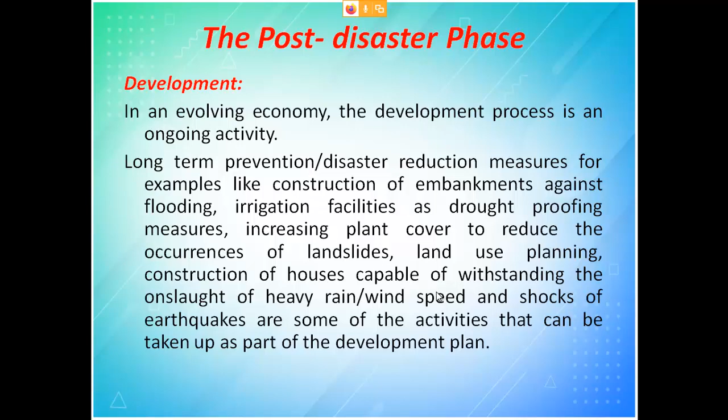Land use planning, construction of houses capable of withstanding heavy rain and wind speed. So you have to construct houses such that they withstand heavy rain, wind speed and shocks of earthquake. These are some of the activities that can be taken up as a part of the development plan.

Damage assessment methodology. Now we move on to damage assessment. The primary focus is on the condition of physical assets. The first one is buildings. We do damage assessment for buildings, then roads, bridges, then water supply and sanitation, then dams and other irrigation structures, then industrial facilities including power plants, ports and other coastal structures, electrical and communication system structures.

So it may be asked as a 16-mark question: how are you going to do assessment for disaster management? When you say assessment, you have to do it for buildings, roads, bridges, water supply, sanitation, dams, other irrigation structures, industrial facilities, ports and other coastal structures, electrical and communication systems.

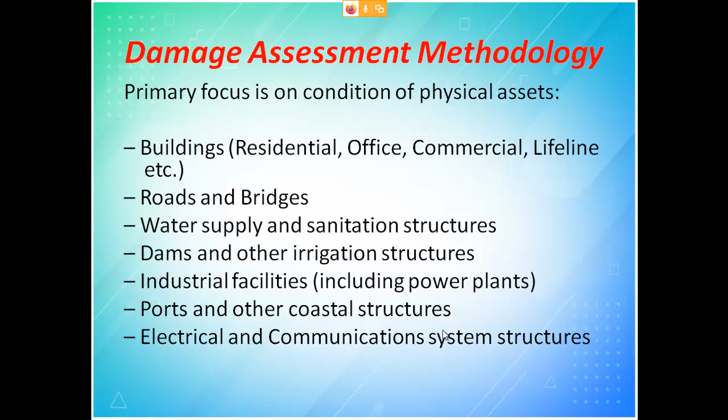I think in Vardah we have seen, this last time, the electrical and communication system totally collapsed. Your electrical towers and communication towers, all have been uprooted. So you have to do assessment. So how to overcome this? Let us start with the objective of damage assessment.

It widely depends on the type and the intensity of the disaster. So it is not common; you cannot do a common damage assessment. Depending upon the disaster, first of all, it will vary. Then the intensity. Disasters will not be the same all the time. We have seen so many cyclones, but Vardah is different. Usually when cyclones cross the land, they lose power and just give rain.

Whereas Vardah entered and even crossed to the other part of the peninsula. Even Kodaikanal is a place where they have not seen a cyclone at all, but Vardah entered till the Kodaikanal region and uprooted so many trees there. This has not occurred previously. So that is what we call intensity. In some cases intensity will be less, in some cases more, and if intensity is more, the damages will be more. So you have to go for assessment properly.

Again, in damage assessment we have the classification as short term, medium term and long term. Short term is within a few days: to quickly identify safe and unsafe buildings. You go and do your study, identify whether the building is safe or not, quickly estimate the total damage losses, and quickly identify the status of lifelines of the building and other structures.

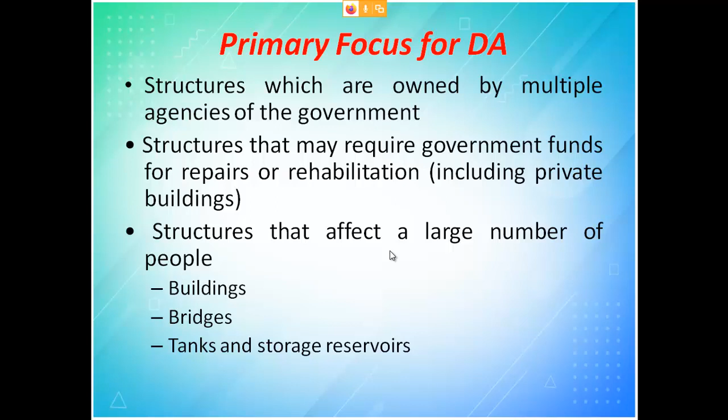Secondary focus is structures owned or operated by specialized agencies. There you will not have such problems. These are very complex structures that require high level technical skill for assessment, like complex industrial facilities. A normal person cannot be taken to a power plant and asked to assess it. He cannot do any assessment at all.

For example, as final year students, you can be asked to assess your house for electrical safety. You all know the basic requirements: there should not be any switch in broken condition, and if there is, that switch has to be replaced. A normal switch might be a 5 amp or 15 amp switch. If you are joining wires, there should be insulation tape to join them. All such things are very common for your house.

If you are asked to go and do the same audit work in an industry or in a power plant, you cannot do it. Specialized skill is required for complex industrial facilities.

Port and harbor structures are another example. A normal civil engineer who constructs houses cannot be asked to assess a port, because the structure itself is different. Then petrochemical infrastructures, dams, roads, electrical generation and transmission networks, all these require special skill.

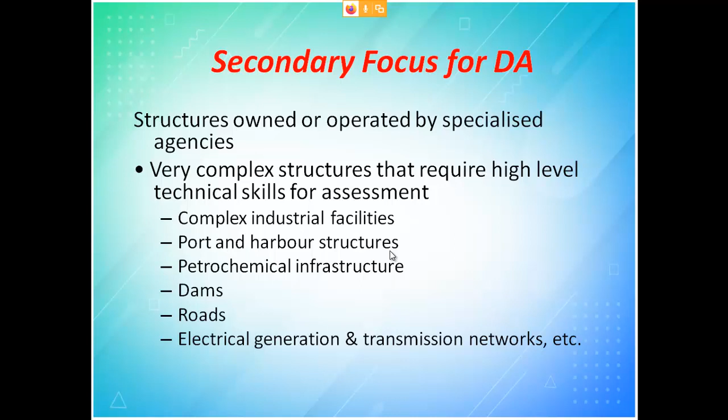The basic philosophy of assessment should be based on international sound practice. When going for assessment, I have a guidelines book, which we call a cookbook, published by international agencies like IEEE, IET and others. You have to follow that procedure.

I will give one small example. In your house you may have an EB board, a small wooden board about 1 meter, with one fuse carrier and one changeover switch. That is normal. But for an industry, if you are putting a panel, then in all three directions the wall should be at least 5 meters away from the panel.

The reason is, if I go and touch that panel and get shocked, I should not go and hit any wall. That could lead to multiple injuries from the electrical shock and from hitting my head on that wall. This is what the standard says: you should have a wide space between the panel and the nearby wall.

You can do this only if you have sound knowledge of international practice. You should consider the types of structures prevalent in Gujarat, as an example. They should consider the technical skills likely to be available after a disaster, and should incorporate experience from recent disasters, particularly the 2001 earthquake and 1998 cyclone. They say this has occurred, try to get knowledge from that.

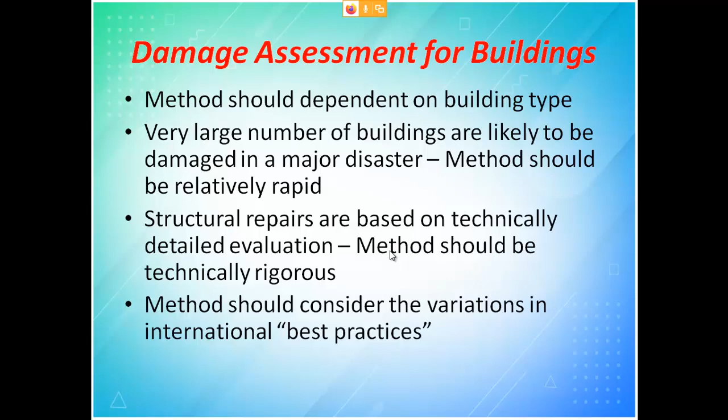Damage level is shown here: slight damage, moderate damage, extensive damage, then the percentage, then comes immediate occupancy, damage control, life safety, limited safety, near collapse. When damage is more, the assessment report says safety is not there. If it is moderate, they say life safety is possible. If it's very slight damage, they say immediate occupancy — you can go and occupy after the disaster has occurred. This is the level of damage.

10, 20, 30, 40 percent we call slight; 50, 60, 70 we call moderate. When damage is more than 80, 90 percent, we call it extensive damage. So if the damage is more, depending upon that, you decide the control action.

Then they are split into grades: grade 1, grade 2, grade 3 and grade 4. Grade 1 is slight, grade 2 is light, then comes moderate, heavy and major, and a color indication is given. All this, the person going for assessment should know.

When you see 'light' anywhere, it is understood to be in the middle of slight damage. When you see 'heavy', it should be in the order of 80 and 90. 'Major' means more — it's a partial collapse. In some cases, we mark it with a color like green tag, yellow tag, and red tag. From the color, you are also supposed to identify the level.

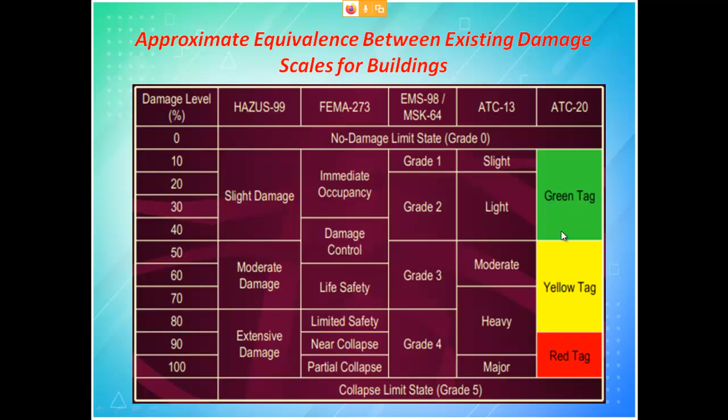Then the proposed procedure for damage assessment of buildings. International experience clearly shows that a single fit-all methodology is not feasible to satisfy all short, medium, and long term objectives. That is what I already told you — safety as well as assessment is not common for all types of buildings.

In other words, if I write one set of rules, those rules will not match all types. So you should not say it is there in the book and that we should just follow it. That is why they say fit-all is not at all possible — everything will not fit all. Some codes will fit particular types of buildings, and some will not.

A three-step methodology has been proposed: rapid safety assessment, detailed safety assessment, and engineering evaluation. From the word itself it is clear — when you say rapid safety assessment, by seeing itself we can conclude this is worst, this is okay, this is a condition where you have to keenly watch.

Detailed safety assessment means taking old records, trying to visualize, and seeing if the same building was there in a previous earthquake — what was the level then, and what deterioration has occurred now. When you say engineering evaluation, take paper, pen, and do calculations. You might have studied many experiments — put all that experiment into real time and try to see what the condition is. That's what we call engineering evaluation.

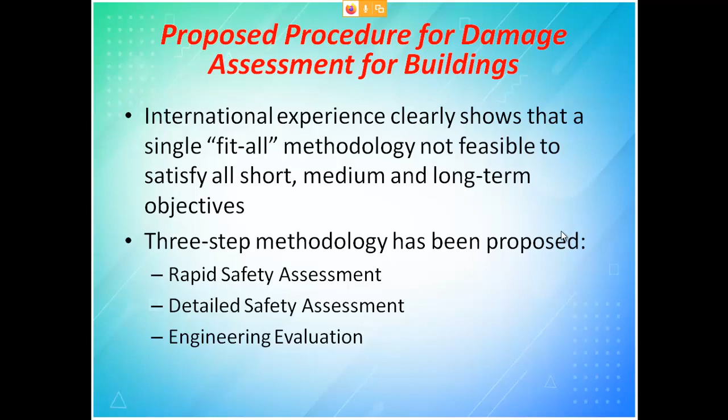That is what is explained here. Let us skip ahead. Then damage assessment for bridges, low redundancy structures — try to understand this part. This is more about civil and less about electrical, and nothing with respect to mechanical, because structures are predefined here. Now there is no structure — only civil and electrical matter.

Structural repairs are based on detailed technical evaluation. The method should be technically rigorous. Damage assessment is likely to be carried out by a technical person. From the first, I'm saying only a technical person should come into the picture.

So there are government opportunities for you to get into this area — government jobs are there. Only we are not getting in, but there are many government jobs for assessment. One who does assessment is called an assessor, similar to energy auditing. There are auditors required for disaster management also.

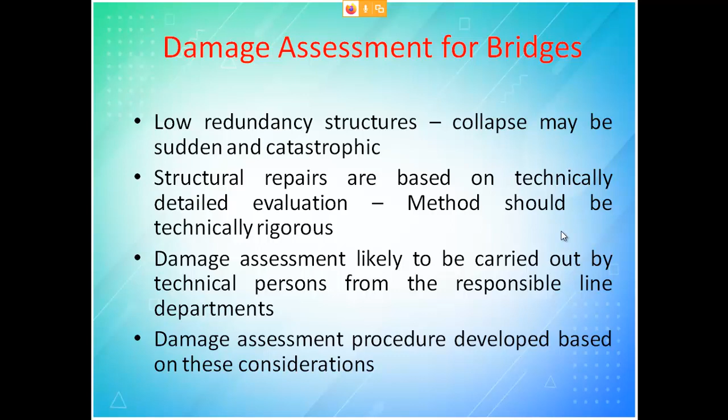Then storage damage assessment for storage reservoirs also requires technical knowledge. Initial damage assessment is likely to be carried out by checking what was the condition 10, 15, or 20 years back, and from there how the damage has progressed, so what should be done. The damage assessment procedure is developed based on these other considerations.

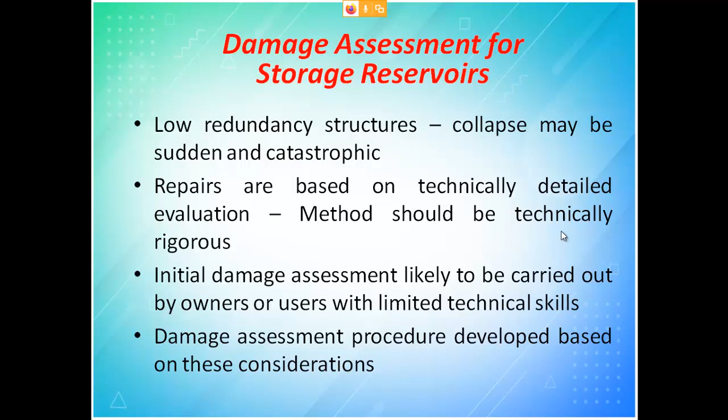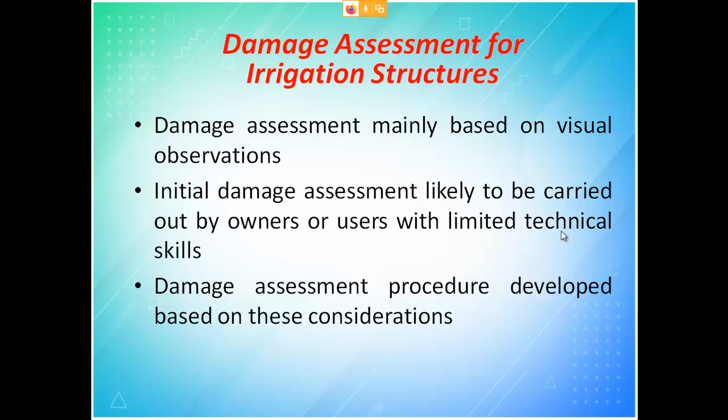Then you move on to irrigation structure assessment, mainly based on visual observation, where you go and see through your eyes and say what the condition is. The initial damage assessment is likely to be carried out by the owner or user with limited technical skills, and the damage assessment procedure is developed based on that consideration.

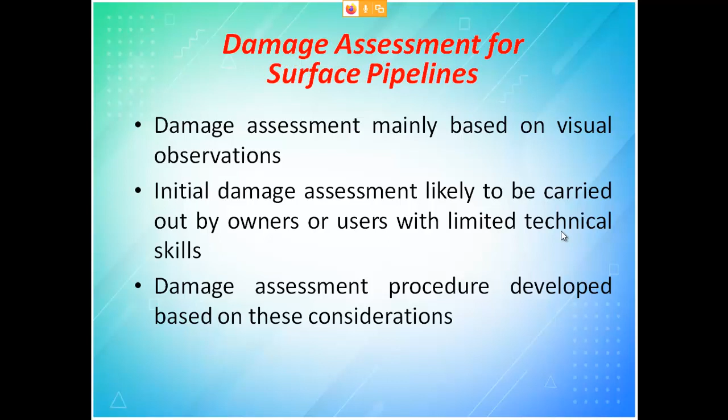Then comes surface pipelines, which is more or less the same as the previous case of irrigation structures. There's no real difference, only the word pipeline is used instead of irrigation, that's all.

Then comes electrical. The only difference is, in the previous cases the skilled person was civil, whereas here the skilled person is an electrical engineer who should know all technical details regarding electrical issues. Electrical issues carry more risk than civil, so consideration should be properly done with all types of technical knowledge.

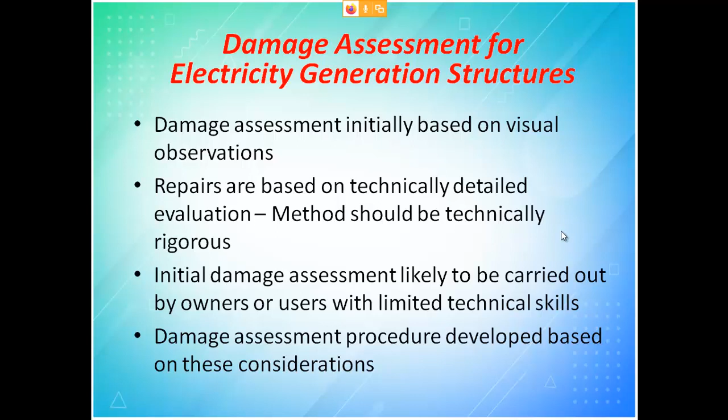Then comes industrial structure, where industrial structure and electrical are both the same. There is no much difference, because wherever you say industrial, the key person is only electrical, not civil. Nowadays everything is automized, so the entire role in industry is on electrical. You might have seen automobile industries where the mechanical engineer's role is not there at all, because everything is electrical now. So when you go for assessment also, the electrical engineer's assessment is more required.

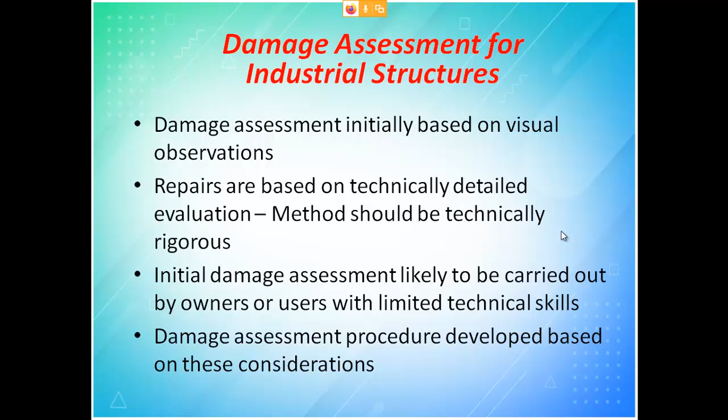So with this we will wind up today's class. That is with respect to unit number 4, and with this, unit number 4 is complete.